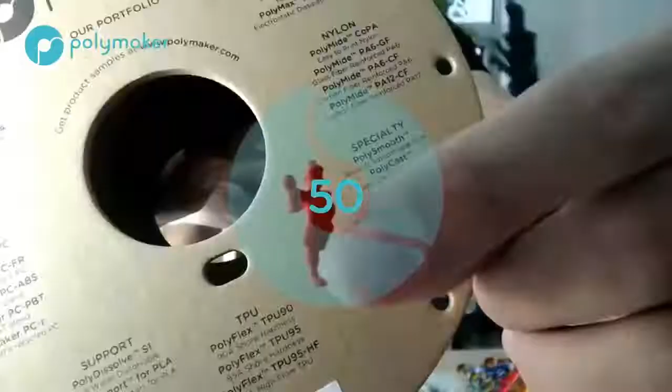So we are in the lab. 40mm tube. Whoa. Be mine. All our different materials. How do you guys like this?

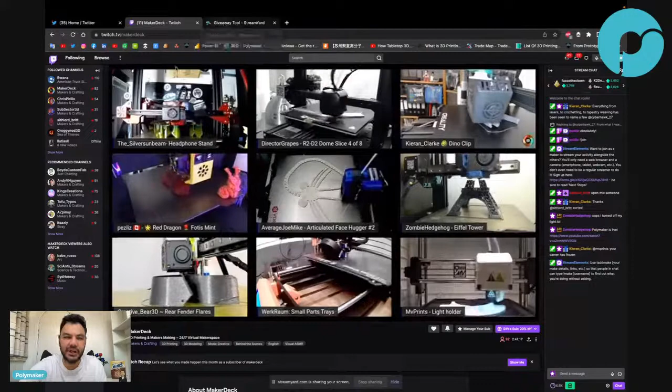Are we going to start with MakerDeck? Well, I had MakerDeck on screen just now, but this is more for Saturday, we're going to do our printer practice. Well, actually, now that I have it on screen, I really want to try very quickly.

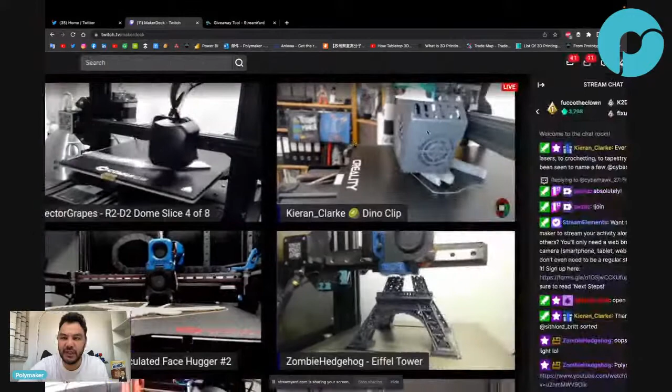Yeah, I failed this one, I don't know, the 3v2. Quick, I think this is Anycubic Viper. And then very quick, I don't know, kind of Prusa Mini. And then Voron, and then Focus, that one we did already. And then what is this one? And then Flashforge Adventurer. Okay so that's my really quick printer practice.

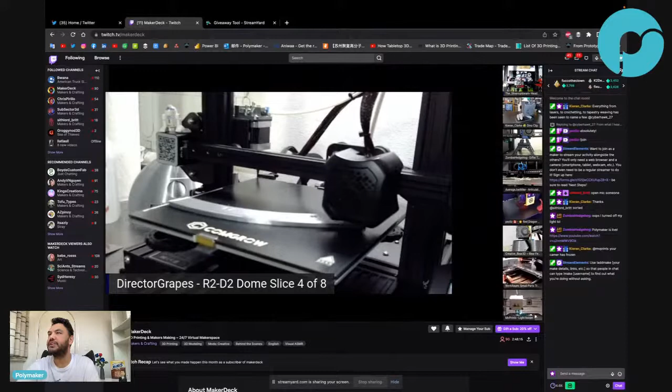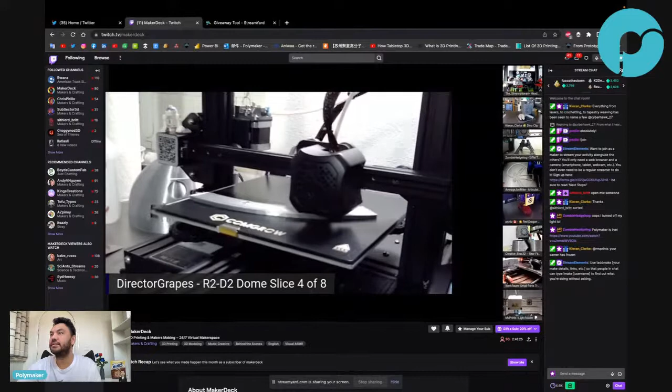Good evening everyone, hey pezliz. Yeah pezliz, I woke up late, I woke up 30 minutes late.

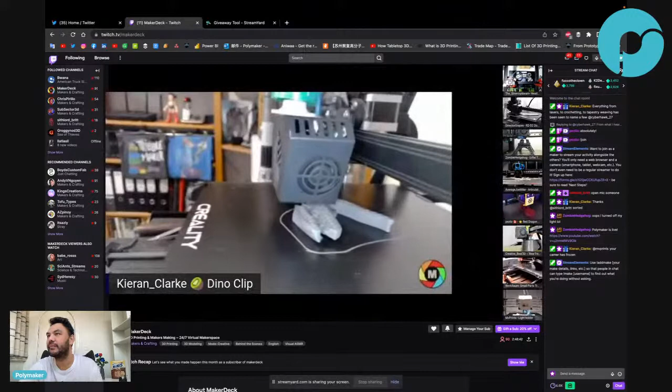Gesundheit. Thank you, Irip.

Top right is the Ender 3 Max. We will work on your printer knowledge.

Did I have a lot wrong? Yeah, I think now they have it. I think we can play the game. I think they have some kind of command that you can use to quickly get the printer name. So I think if I do something like bang make... Kieran_Clarke. Kieran_Clarke. Oh, bang make, or maker. Oh no, bang make maybe.

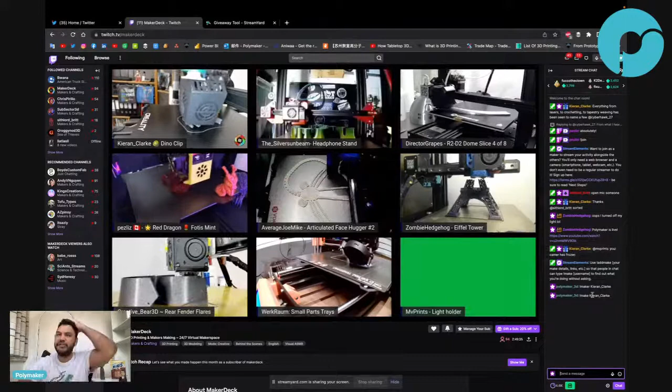Another thing is my messages somehow have been off, like sometimes I'm on Twitch and I send a message and nobody receives them, and I have no idea why. I already told pezliz about it.

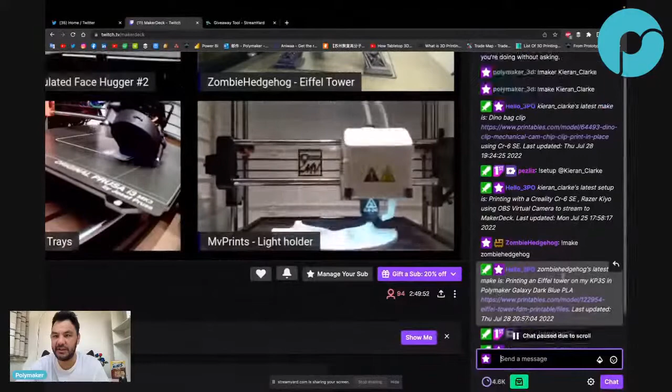Okay, so latest make, blah blah, CR-6. Yeah, you see, now you have all of these printers, but I think they were working on something as well, I don't remember. Setup pezliz, latest setup, blah blah. So there's bang setup and bang make, but anyway, I like to play that game in order to get a little bit better at recognizing hot ends and printers and stuff.

We will work on it, we have bang setup. Bang setup, what's the difference? Hi, hi, Kieran. pezliz's latest setup is fucking Odin 5, iPhone 7. Oh okay, so one is make, like what?

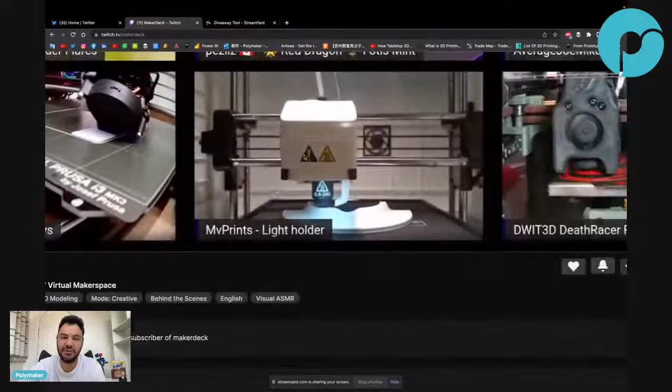Zombie is really using Galaxy Dark Blue like all the time. He's not only recommending it, he's using it also all the time. But anyway, now you have access to more information, so you can play the game sometimes, like recognizing the filament or recognizing the printer, or well, maybe not the iPhone, or what's the camera, but what is MakerDeck?

That's my line. Hi everyone. I wonder why pezliz's, yeah.

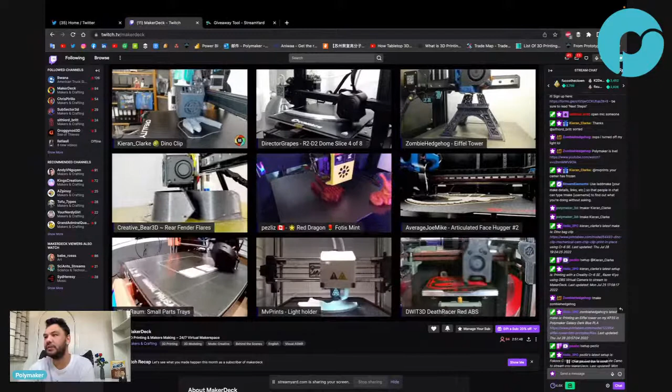If you want to do some giveaway, well, I'm thinking about it. Like, I think the best would be if you are an engineer, or there is some engineer from LDO that would like to come into PRINTBUSTERS, that would be great. I was thinking about if you have some stuff to give away, but I'm more interested in if you have some people that would be interested in coming into the stream and explaining to us some stuff about hardware. That would be more valuable, I think.

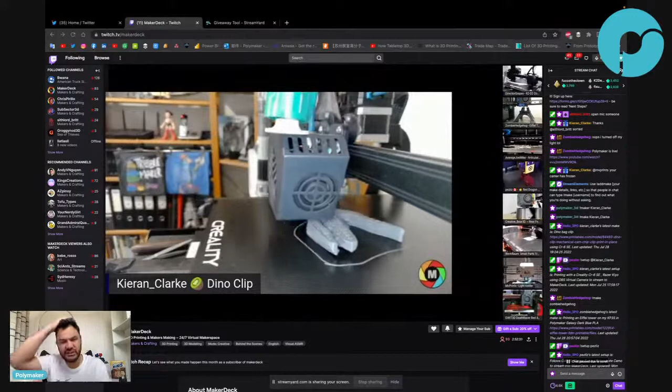Mechaduck was on Prusa, but unfortunately I didn't see it. I need to check, I don't know, I guess it was a presentation of Mechaduck or something. Creality has like 5 printer heads with the Neo one, and like 20 printers with weird combinations. Yeah, but we need to practice, if we practice then we're going to recognize all of them. Explain the hardware, then give it away. Yeah, that would be nice also.

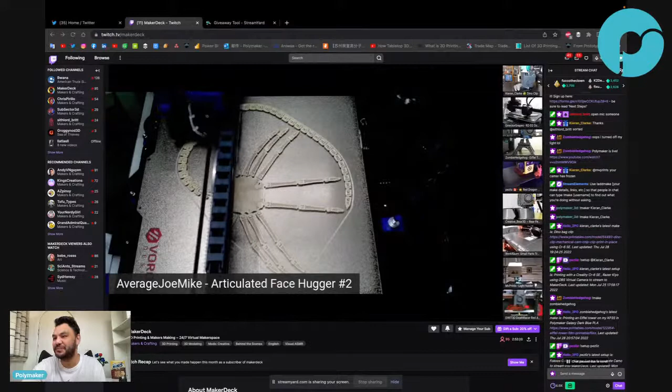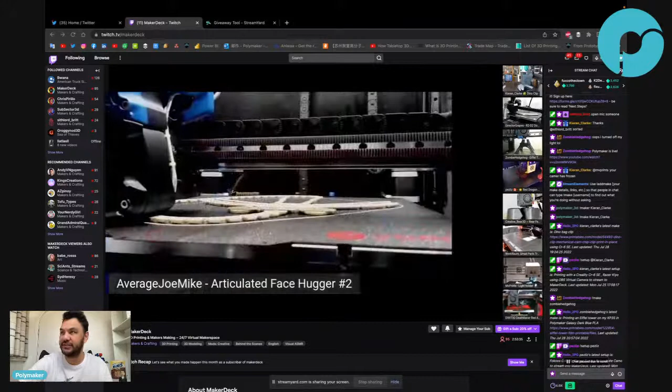Okay, let me get back to you about getting an engineer for a future stream. Oh yeah, that would be awesome, that would be awesome. So you guys are making hardware, right? And I think one of the main things you make is the stepper motor, and you are doing kits. So we are going to talk about the motion system also today, and I'm pretty sure you are making also some of those parts. That would be so cool.

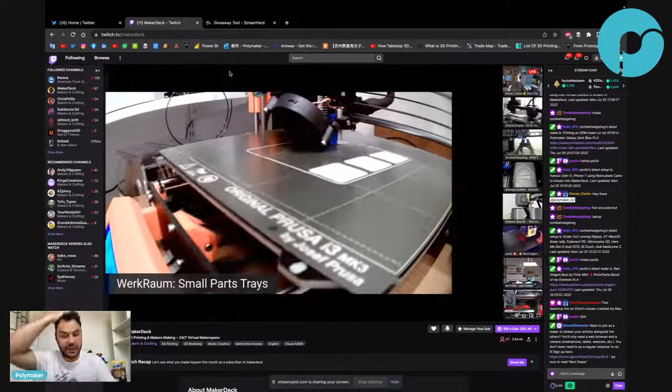Okay, so how about we have a look at that warping stuff? Let's go. I was just waking up by reading a bit of the chat, so my mind is warmed up before we get into that.

So again, we were talking about warping, and I went through the usual stuff about why, why, why, and then Resu stepped back a little bit, thought about the discussion, came up with something, came back and wrote a nice thing about warping, and that's the thing I want to check with you guys.

Okay, here we go. The data does back it up. So in the stream, there was a question if the thermal expansion value of PLA and PC are similar, why does PC show more warping? I even used a lower thermal expansion value for PC and still predict higher warpage based on my model.

Okay, so his hypothesis is to explain why a material would warp more than another one. His hypothesis is that when the hot bead is laid on top of the cold layer, the temperature does indeed even out. So when you print one layer on top of another, the other layer is going to absorb some temperature from the bead you just laid down.

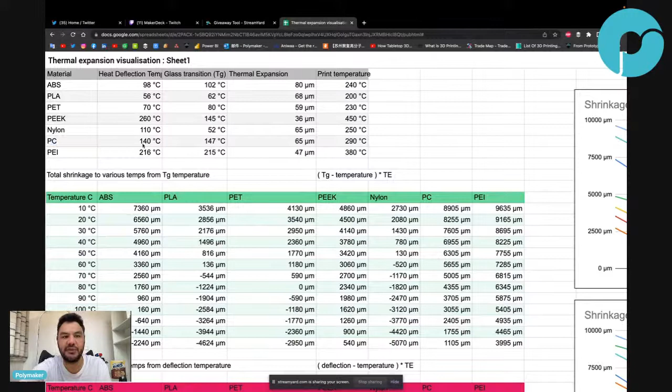And then our question was always, why does PC warp more than PLA if the thermal expansion was the same? And then you have the print temperature. Again, PC doesn't have to be that big - our PC TG is 110 and printing temperature 260.

But okay, and then total shrinkage to various temperature from TG temperature. So you have 10 degree. So then he's total shrinkage to various temperature from TG temperature. Okay, so now he's calculating - if you are, let me check.

Total shrinkage to various temperature from TG. So if you are 10 degree from TG, which means 90 degree - from 100 degree to 90 degree, I guess, then it's going to shrink this amount. And then from 100 degree to 20 degree. Oh no, so what is she saying? Total various to temperature from TG temperature - TG minus temperature, times the thermal expansion. Okay, so that's the temperature.

Oh, so that's the room temperature. Sorry, that's the room temperature. So if you print with 10 degree room temperature, then the shrinkage rate is big because the difference between TG and the room temperature is big. And then if you print at high room temperature, then the shrinkage reduces.

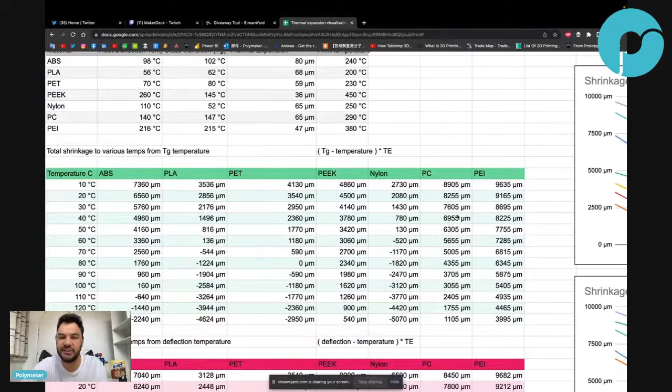Okay, and then he has for ABS, PLA - for semi-crystalline it's hard to say because crystallization has so much to do with it. So let's just stay on amorphous, and then PC - shrinkage rate total TG to C. And then total shrinkage to various temperature from deflection temperature. Okay, so it's the same, it's similar. So okay, no problem.

The upper graph there is showing expected thermal expansion from TG, which was my first guess. We can clearly see that the data doesn't correlate with what we would expect. Based on TG only, nylon would be more stable - again, nylon is semi-crystalline, so I would remove it from the equation. But if we look at deflection temperature instead, we can see that the data shows a clear correlation to what we would expect. Okay, so now he's making a clear difference between TG and heat deflection temperature.

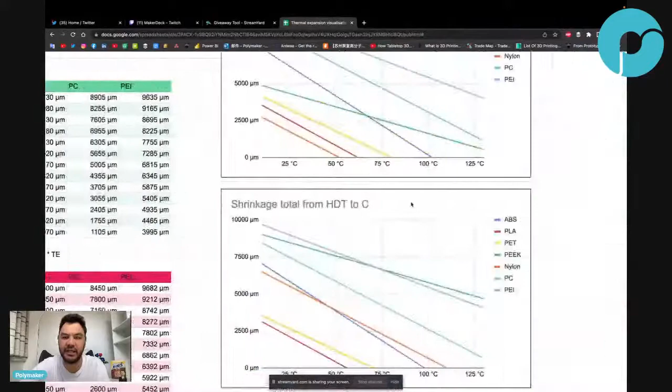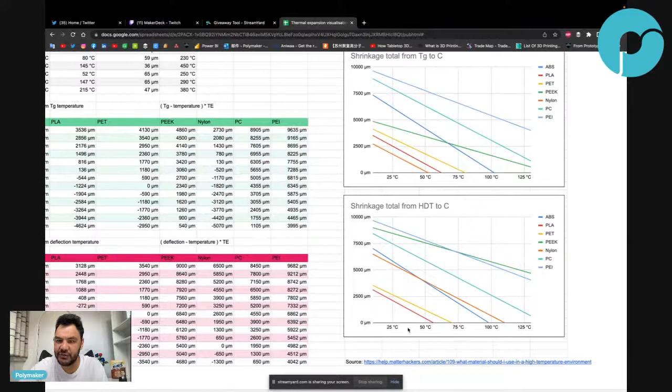So if we go heat deflection temperature and then PC and PLA in red and PET there. Okay, so basically, let me check nylon. Yeah, but I think he shouldn't take nylon because heat deflection - so basically

here's what happened. I think he made the thing with the TG, and then he realized nylon warps less than PLA, and then he went to try to find different data that would make nylon warp more than PLA. But the problem is, in my opinion, nylon doesn't warp for the same reason. Nylon warps because it's semi-crystalline. Nylon warps because of crystallization. Michael, if you have read the book, then it's in the book.

So I think TG was great, and TG and HDT for amorphous material are similar anyway. So I don't think he should have changed his data just to make it fit. We don't try to find data that matches the reality without explaining it - you get what I mean? Like you don't choose the graph that matched the reality and say that's this graph because it matched the reality. It needs to have some explanation.

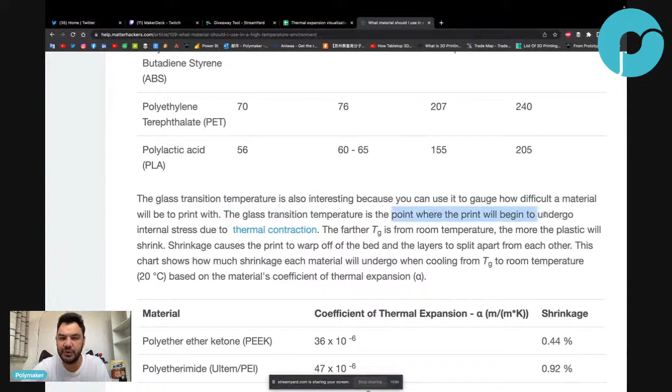The glass transition temperature is also interesting because you can use it to gauge how difficult the material will be to print with. The glass transition temperature is the point where the print will begin to undergo internal stress due to thermal contraction. The further TG is from room temperature, the more the plastic will shrink, blah, blah, blah.

Yeah, again, my take on this one. But okay, so now let's go back to this. What do you guys think about this explanation? For me, that's not the first time someone brings up that TG, and my answer is usually always the same.

My answer is, if that's the case, if you print ABS at 230 degrees or at 260 degrees, the result would be the same, which for me, in my experience, and I hope in your experience as well, because I know you guys print a lot, that's definitely not the case.

Depending on the printing temperature, you have different results. If you print ABS at 230, some ABS can still extrude at 230, then it will warp like crazy. If you print at 260, then much less. So why is that? The TG is the same.

The difference between TG and room temperature is the same. But why does - so the follow-up question to that explanation is, why does printing temperature affect warping?

Okay, and we have seen some research of people printing at different printing temperatures, and they had different warping results. It was a quick research - only five times, three tests at different temperatures, but we started to see a correlation.

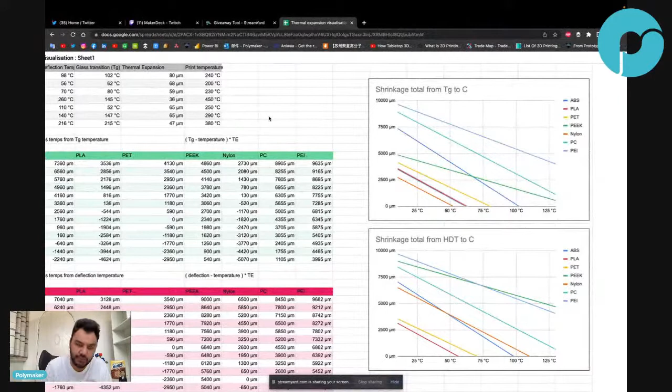In that case, if it only depends on TG - so first I will clarify that he should remove semi-crystalline and remove the HDT, because I think it doesn't make the explanation accurate. But if you remove that, then it's very clear.

Now the question, and it makes sense - that's the most important, it makes sense. However, does that answer the question on why the printing temperature affects warping?

When I say printing temperature, I'm talking about the extrusion speed, which means printing speed and printing temperature would affect warping.

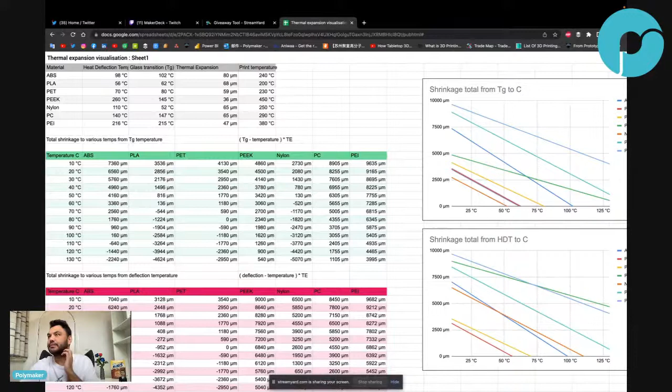Okay, so look at my photo just over this text. It's PolyTerra PLA.

Oh, this one. Did you have any warping issue? Sorry, it's a little slow. Did you solve that? It looks like you're using the smooth PEI from Prusa. I've heard some other people having warping issues with PolyTerra on smooth PEI, so I don't know if flipping it over to the rough surface would be better. But I hope you solved your problem.

Hi 3DHP. Did I answer you, 3DHP? I don't remember, but like I said earlier in the stream, today is my last kind of busy day.

Not trying to be smart or anything, but how much can you beat a dead horse about warping? What does that mean - not trying to be smart, but how much can you beat a dead horse about warping? Is that a phrase? Beat a dead horse? Does that mean you talk about it a lot? Oh, okay, yeah.

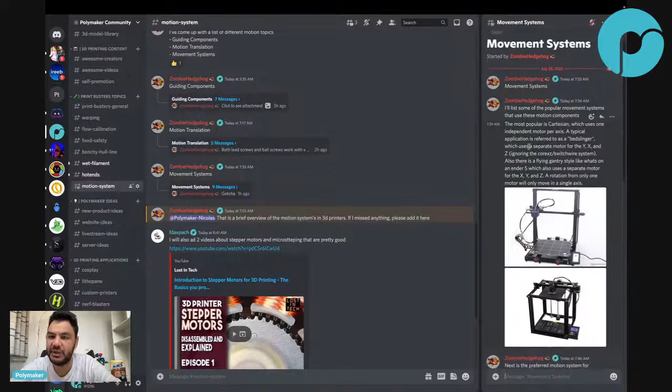Okay, so that's the general thing I was saying, you take a printer and then you remove all the stuff. I think the most popular is Cartesian, which uses one independent motor per axis, a typical application. Okay, Cartesian, and then Core XY, and then you have Delta, I guess.

But it only uses belt, blah blah blah. Okay, understood, and that's okay, so that's the way we are going to organize our discussion around the pros and cons. So you have different guiding components, the connection, okay, and then the motion translation, and then the movement system.

Yeah, I think it's very clear, I think it's very well defined, and yeah, I really like it. At least for me, it's extremely clear - well, clearer than it was 5 minutes ago.

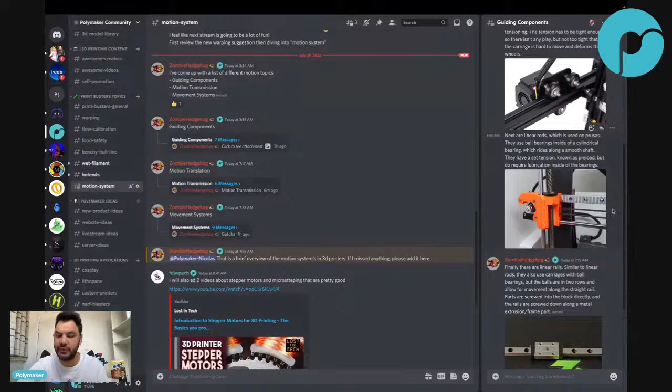Do you want to come and stream now and give us the pros and cons of the different guiding components? Maybe we can focus on the guiding component, and depending on whether we have time, then we go to the other one. Sure, okay, let me figure out how to invite someone on the stream.

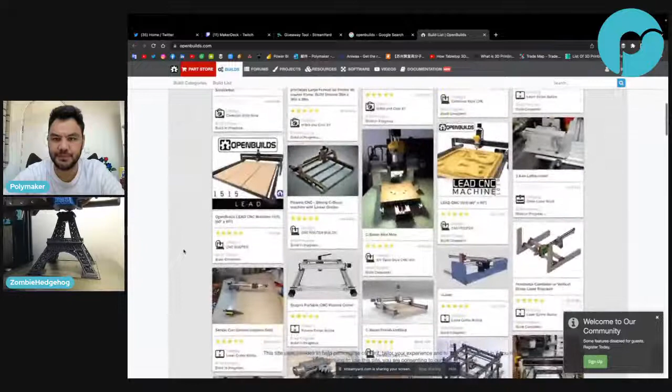Is that another Voron style? I mean not Voron style, but custom printer stuff. I haven't looked much into it, but it's like this custom printer. Open Builds itself right now is just a collection of all these custom printers that people make and design. But there's an Open Builds specific motion system that uses slightly smaller V wheels. They do more CNC than printers. Oh, it's a company, okay, I didn't know that. So they're a company and they use a specific V wheel system. Okay, V wheels was designed by Open Builds. Okay, oh interesting.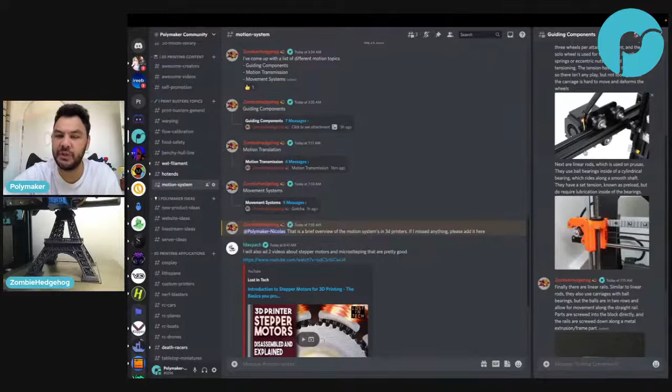Okay great, and I think there was a question about how fast do the friction components wear out with the rails. So I guess each of the guiding components will have a wearing issue. So how do they compare with each other?

Okay, so V wheels are probably the worst. I wore mine out in about a week. A week? Yep. I had them too tight and they deformed, and my print quality suffered. So I had to order new wheels, probably like two weeks of printing. I also researched this stuff, since I had no knowledge of 3D printers, so this was from scratch. But yeah, I had them too tight because people said you just want to get them really tight. So I made them really tight, and then you could move the carriage and it's just lumpy, it feels like lumps.

And then would the other have a similar issue? Because it looks like there's no rubber part on the other. So the others use... I don't know what the rail is, it's probably like a hardened tool steel. So it's a very hard steel rail and a similar steel block, what do they call that, a carriage. Similar carriage, and then they use hardened ball bearings. So it's metal on metal on metal.

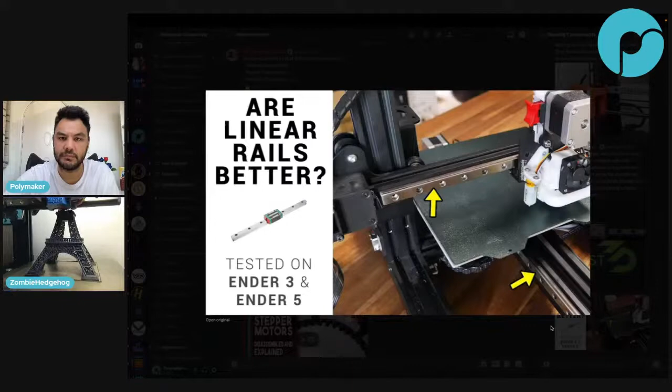Okay, so if they're lubricated properly, then they last a long time, and all you have to do is once in a while relubricate. Okay, so the maintenance for a V wheel is just to make sure they have the proper tightness, not too tight, not too loose. The maintenance for linear rail is once in a while just lubricate the ball bearing inside.

Right? Correct. Okay, and how about in terms of what you were talking about, you really need the proper rigidity. Is there... because the linear rail, you were saying you bought it as it is, right? The user cannot change anything, so that means it's actually much easier for people to get linear rail in a way that they won't have to tinker with the tightness, right? Or is there some kind of screw somewhere that would make the ball bearing tighter than other, or something like this? Nope, it's completely manufactured.

Does anyone in chat know what makes the preload, the stiffness, the preload? Like how do you define that? Actually, is LDO still here? They would know. Yeah, maybe. Because there's the rail size, which I think is consistent, and then there's the ball bearing size, and then there's the carriage size. So there's those three components, and the combination of sizes of them would define the preload of the tension. Okay, would it be... do you think it could come from the accuracy?

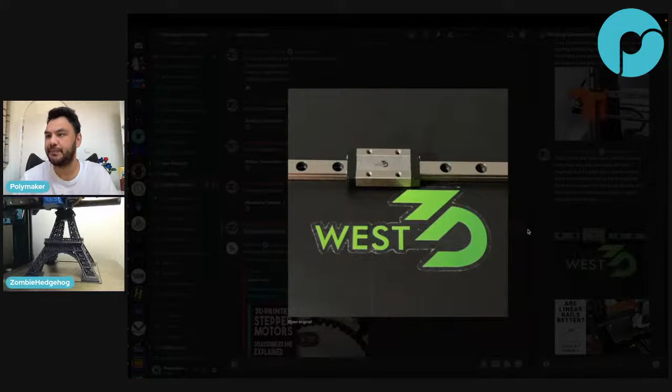FDAF patch: preload comes from the machining tolerances. Lower tolerances give you bigger and higher preload. Yeah, that's what I was thinking. But then that would make the more rigid part more expensive, I guess. Preload is the tolerance between the rail and the inner top face of the carriage.

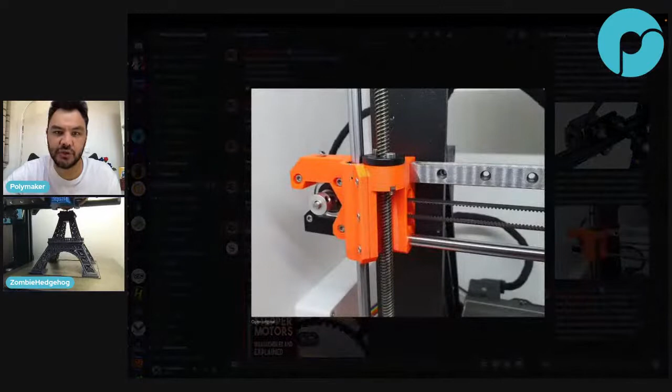Wait, actually there's a third one - what is this one? Linear rod. Yeah, that's like what a Prusa uses. I believe that's the technical term, linear rod, but it's a very similar concept. There's a bearing, but the balls go all the way around it, kind of like in a cylindrical zigzag.

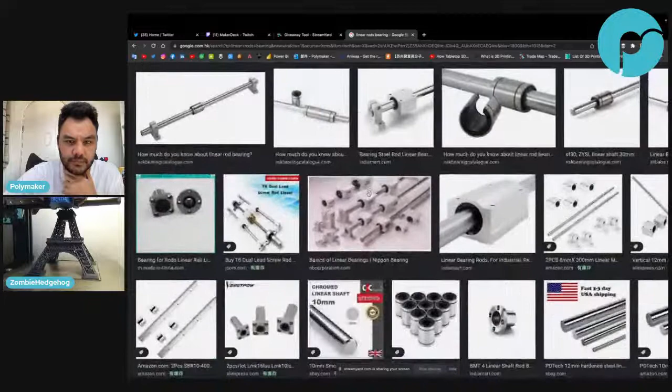Maybe we can pull up a picture of a linear bearing. They ride around a rod, so the rod itself is only supported at the two ends. Should I look at the live one? Yeah, that's a cutout of it - this one has the balls just going back and forth. So it's just like a linear rail, except it has 4 sets of balls, usually 4 sets of balls that make contact with the rod.

So now the question would be, because it seems to be the same idea - linear rails or linear rod bearings - but one is a cylinder shape and the other is a rectangular shape. Is that the only difference? And how the rails mount. I believe linear rails have more constraint, so they don't jiggle as much. I believe.

FDAF patch: they machine a lot of rails and carriages, then test the tolerance and match them according to their tolerances and the space between rail, ball, and carriage. Lower space gets a bigger preload. Okay, so they don't actually manufacture it specifically for that - they just spec out their rails as different preloads. Seems like so. Okay, which would make the price the same - now it explains why they are the same price.

It's kind of like how they make processors, CPUs - they just make them, then test them, and the good ones become high quality processors, and the bad ones get partially disabled and sold as cheaper, but they're all the same thing. Oh really, I didn't know that. Yep, interesting - that's why all the expensive ones come out first.

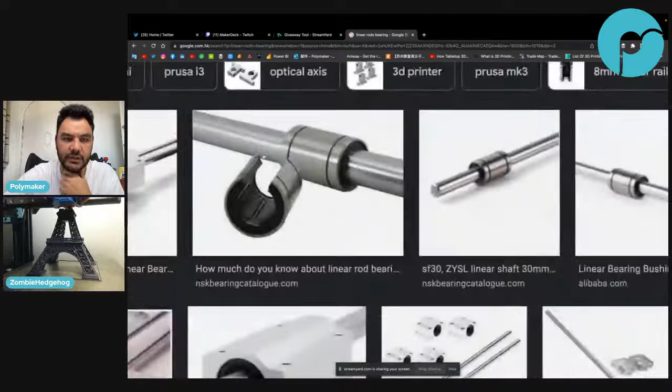Sorry, can you repeat that? Linear rods are only connected at 2 points. The whole intersection is open, it's floating, unsupported. Oh okay, yeah I get it.

And the linear rail, yeah, linear rail is screwed onto something. It's screwed onto an extrusion, or usually an extrusion, so that helps add to the stiffness.

Okay, makes sense, so that goes back to scalability as well. Big printers - linear rods would be a very bad idea, right? Because it would completely bend if it's too long, right? Yes. Yeah, okay, got it.

And you were talking about you need a set of rods. For example, I'm trying to understand what is in the middle here. Is that a mix between a linear rail and a linear rod? I don't know why I posted that picture, it's really weird, can someone find that for me and figure out what that is?

Do some homework. I thought it was a Prusa. I guess not, I don't know. It's definitely not a Prusa.

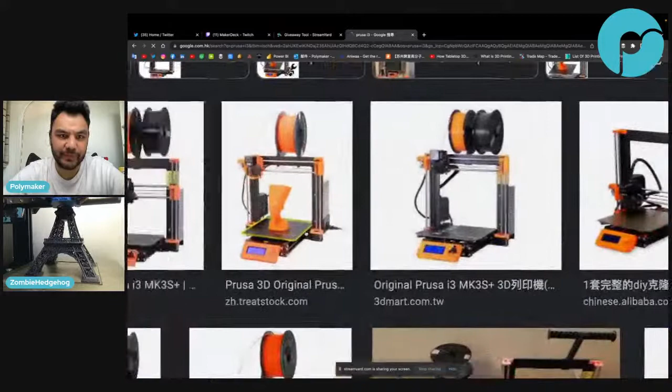Linear rails, or the shape of linear rails, help make them more rigid. Yes, that's true. It is a Prusa - someone must have taken a Prusa and then added a linear rail because stuff mounts to rails better. Oh, Prusa linear rail mod.

Okay, linear rails have become cheaper because of the popularity from 3D printers, and linear rods are getting expensive because they are getting forgotten in 3D printing. Yeah, supply and demand, right?

Interesting. So, is there some other fancy guiding component that you didn't put because it's not common? There's one more - what's that printer called, the Pantheon? It uses all ball screws for everything. I do have that in the other section, but it's not common at all.

You might want to type printer. Yeah there we go. Oh yeah, okay they are using - oh okay, okay, so they - whoa, but is that fast?

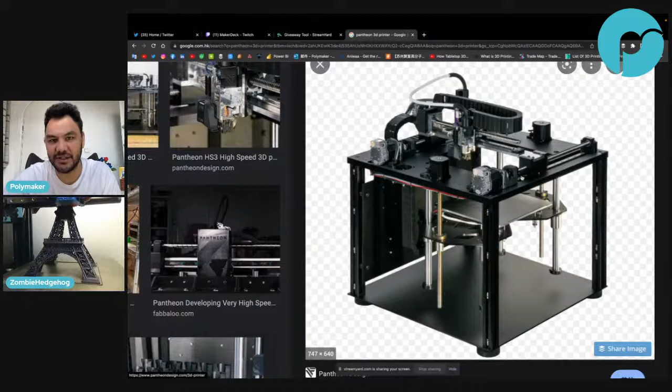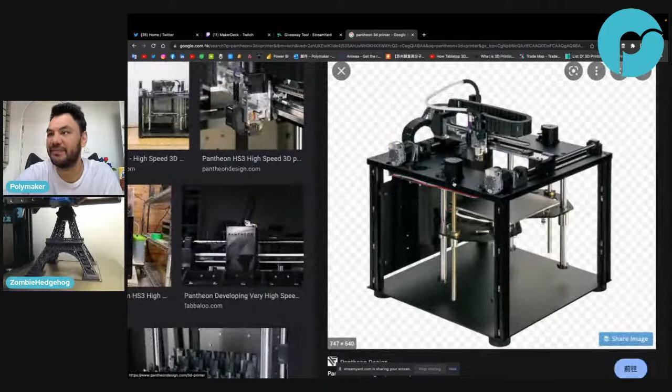Yes, but you need crazy stepper motors, right? I mean, you cannot do that with a regular one, no? Oh, did anyone find that GIF of Nero, or could you post that somewhere? You know the one I'm talking about, right?

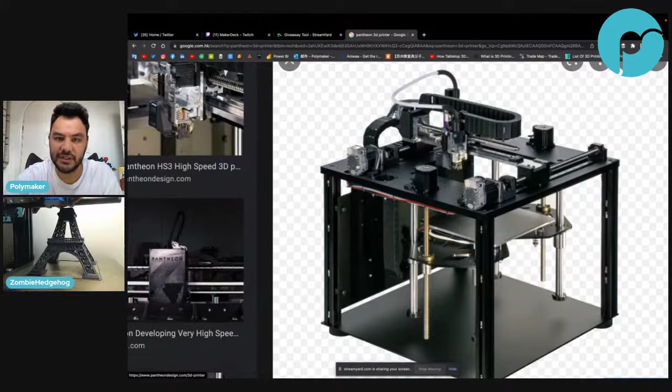Nero on stream, he has a ball screw - sorry, what is it called - a ball screw, and he shows how fast it moves, but it looks a bit explicit so he took it down. Yeah, it looks like the motors are completely different, I mean these are massive, these are servos, so they're closed loop stepper motors, which is something I might look into for one of my printers.

Nice, interesting. So, okay, V wheels, linear rod, and linear rails. Yeah, and they posted the link in chat, yeah, they posted a link down there. And that's for the linear rail.

Oh, so that's the upgrade. Let me open that on the other screen. Let's check that. Oh okay, okay, so there you go - this is where you got the picture.

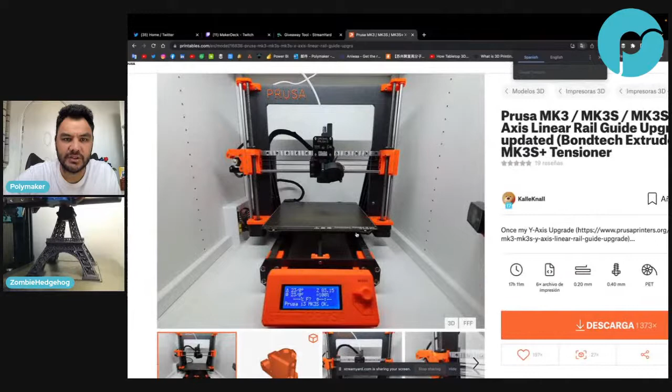Interesting, so that mix must help with stiffness, I'm guessing, because a rail in general is more stiff than a rod. There's just more mass, so that probably adds to the stiffness. That's a belt driven system. I highly doubt that affects it too much for that size, but it's probably something.

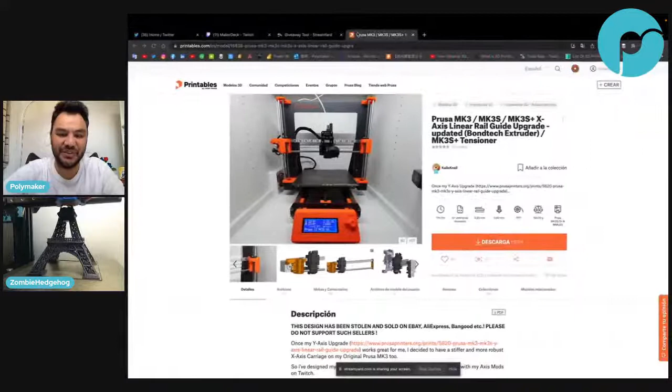Cross gantry... oh, the hang printer. Yeah, I've seen that printer during the TCT show in Shanghai. It's a very interesting one, but very particular. I put a linear rail Y-axis mod on my Prusa. It doesn't allow me to print faster, but it is definitely more rigid and quieter.

Is this something to do with noise? When you choose these, are some more noisy than others, or is it the same? I'm guessing the rods have more balls, so they're louder. The more balls you have, the louder it is, because V wheels are actually really nice if you want a quiet printer, since it's a silent motion system. You can listen to the balls go on a rail.

Okay, I think that probably sums it up pretty good. Did you explain cross gantry? Kenneth, I have no idea what cross gantry is, so I don't know if it's part of this element. Do you know what that is? Zombie? Yeah, it's part of the third discussion.

Essentially, it's core XY, but instead of just having one rail go across, it has two rails going across and a cross gantry. The annex systems use that. It's a lot of linear rails, I'll tell you that. It uses six linear rails just for the motion system.

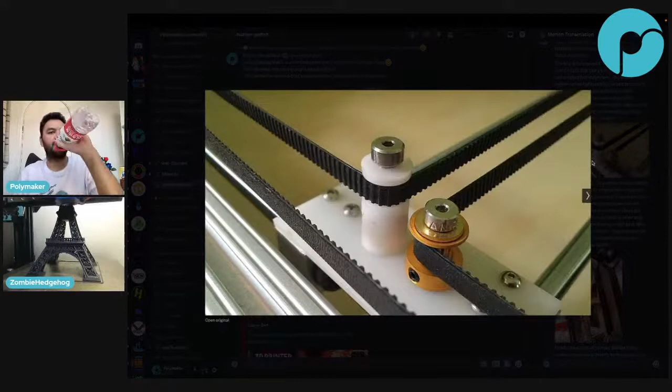Okay, so let's go then. What are the differences? Everyone probably has belts on their printer. Almost every printer design uses belts on at least the X and Y axis because they're the best for speed and cheap. They work very well for being cheap.

I guess I can explain how they work a bit. It's a motion path that can go in multiple directions and support fast movement. So unlike any other motion system you might find, belts can change direction, think about a Core XY or any other printer like that.

Hold on, 3DHP says since you're on live, let Nick know his countdown: 5, 4, 3, 2, 1. He says that out of order. I'll let him know.

That's the main advantage of belts - it's very versatile, can be used in any design. It's very simple. All you have is a motor with a pulley, and at least one bearing. That's all there is. It's very simple, and it scales very well.

Last time we talked about the issue with tension. So is that one of the downsides of belts? Like, what would be the downside?

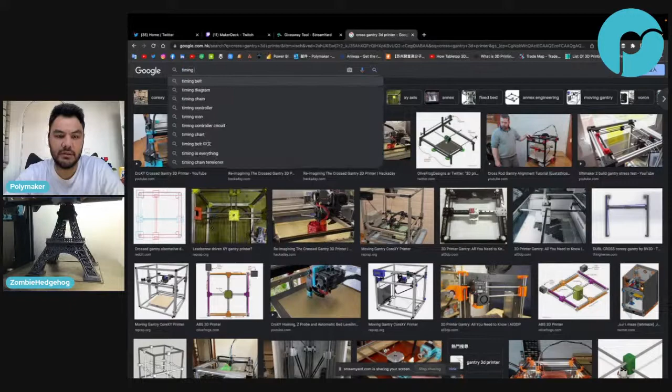Mark and Draka also talked about Gates belts - what's that? I can show you. Gates, can someone explain that in chat? It's just a manufacturer, right? And the GT2 belt is a standard size. There's a lot of vocabulary for that, like V belt, named for its shape.

This is a Gates belt apparently. GT2 is a teeth pattern. So is there a difference between timing belt and Gates belt, or is that the same? I think they're all called timing belts - I think that's the style.

So timing belt is the overall category, and within timing belt you have Gates belts, which are some kind of... Gates is a manufacturer. Oh, Gates is a manufacturer, okay. I'm still learning a lot as I go, same here.

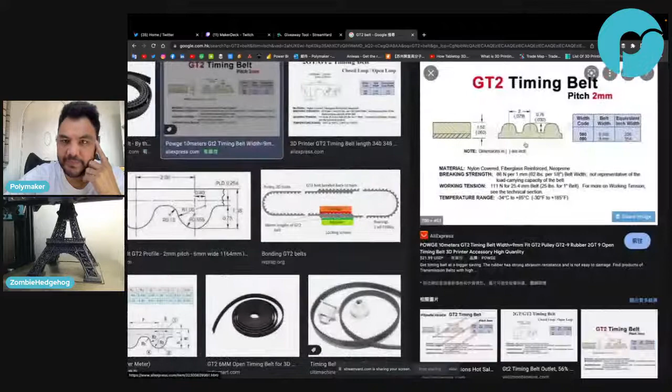GT2 is also a car - they probably use a similar timing belt in the car. GT2 timing belt - that's the specification for the little notches in them. The pitch is 2 millimeter.

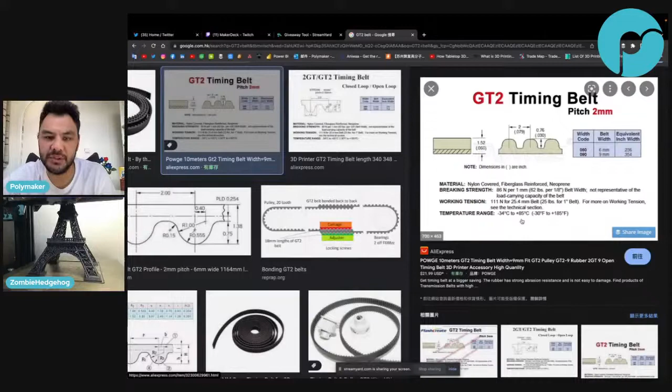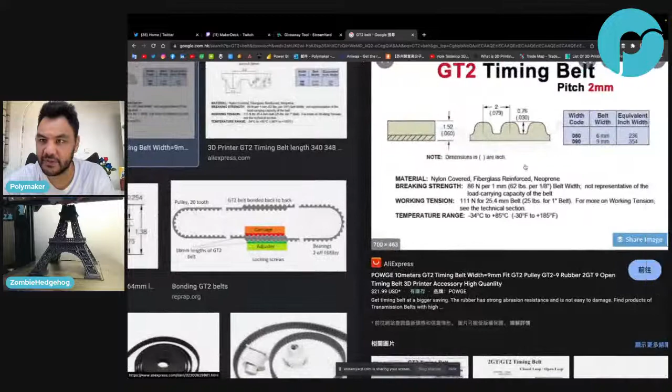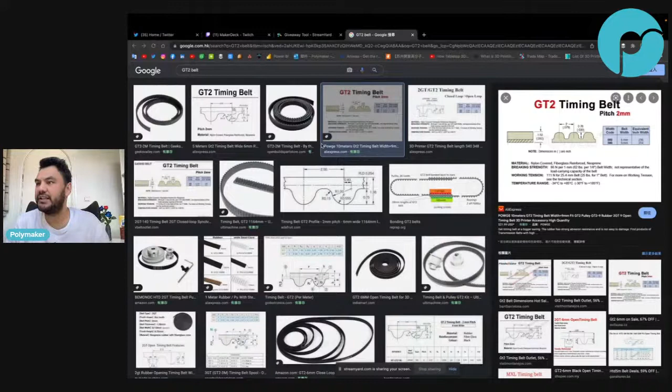Gates does make timing belts for automotive use too. So Gates is a company that makes a lot of timing belts, and they're known for producing very high quality belts. You can get high temperature belts that can withstand over 100 degrees C.

Let me check, let me put you back in. Yeah, there you go. You still hear me? I can hear you. Okay, great. I hear myself now. Okay, that's better.

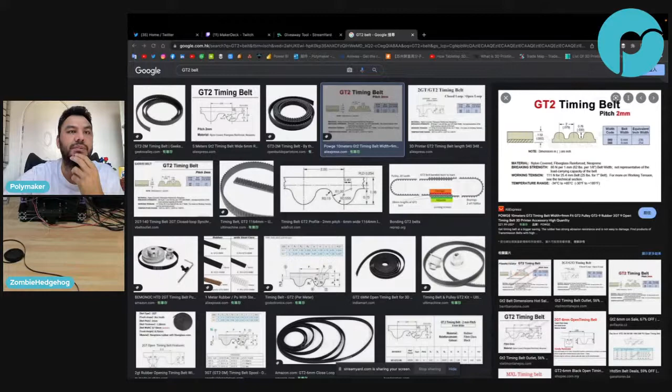So this is actually the belt from a Voron. It's a Gates Power Grip. So looks like that, how do you call that? Power Grip, that's the model. Yeah, that's the model, Power Grip. So that's a typical one you see on printers, and some of them actually come with Gates belts. My BQ came with one, I think. Oh okay, so Power Grip is a model, a product model, right? Yeah, and Gates is the manufacturer of Power Grip. Okay, got it, got it.

Yes, even in just the belt itself there's a lot of stuff. So here's the question, I guess there's a standard pitch for all 3D printer belts, right? Is everything 2 millimeter, or do some printers use a different pitch? As far as I know, all 3D printers use that same pitch. Just different thickness of belts, so 6, 9, 10. And then different material and different reinforcement, right? But the pitch is always the same.

Yep, okay, understood, understood. And by the way, my workspace is not very clean. I just pulled the Nick method of just sliding everything out of the way. Trust me.

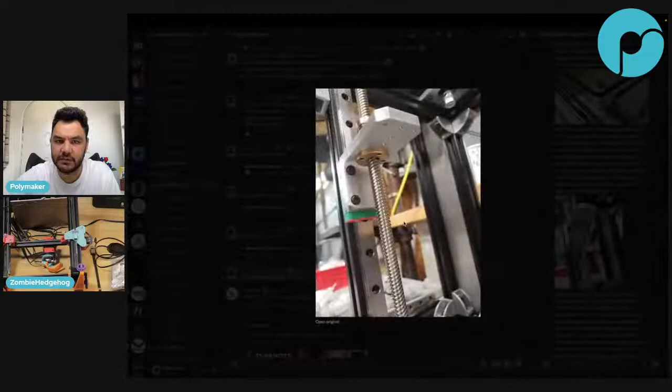I'll be honest, I've heard a lot of mixed topics on that, which would be great to discuss on PRINTBUSTERS if we ever do that. But if you constrain it, then if the rod has any wiggle in it as it goes around during rotation, it's not going to be a consistent rotation, so it's going to have more force as it goes around. It's moving - so I have no idea why that's a thing. It doesn't make sense to me, because if you constrain it, then you're going to have more issues than if it's unconstrained.

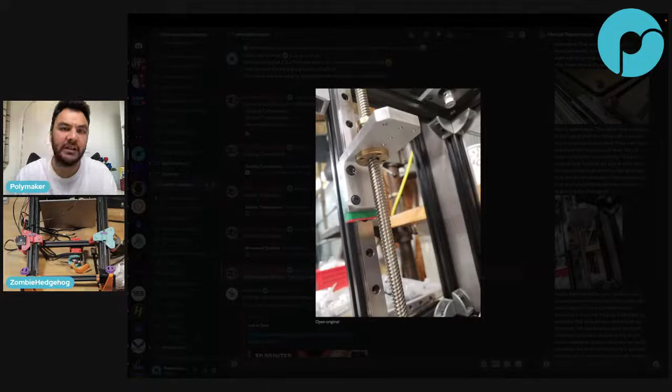Oh yeah, that's a good point, because there's already two parts, right? There's the stepper motor plus the brass part connected to, in this case, the linear rail. So you already have two parts maintaining it. So what you're saying is if you add a third one, then that messes up, because now you have 3 points on the line, and you have to have the 3 points aligned. Right, but 2 points is much - oh yeah, that makes sense.

How about - I don't know if there's anyone in the chat that has this type of printer, but what's your thinking of this? Do you need to put that modification on top where you maintain the tip of the lead screw, or do you think it has to be let loose?

F patch: lead screw is called lead because lead is the property of how much strength or movement you have by one rotation. The correct engineering term is power screw. Oh okay, yeah, here's some good definition there. F patch, you're very good at making a great definition.

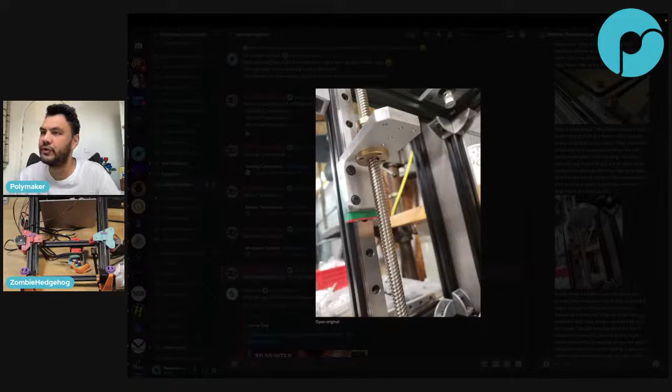You need to get Nero in to talk about lubrication. Why? It's - also lead screw have backlash more easily and more friction. What does backlash mean? It means when you're loading on one side or the other, it's going to wiggle. Is that what backlash means?

Yeah, backlash is - I actually have some anti-backlash right here. Backlash is, since there's play in the system, backlash happens when you move up, and then it keeps going because there's momentum - it can't stop on a dime. So because there's play, you're going to have backlash. So if you have your acceleration on your z-axis too high, then you'll have backlash.

Let me see if I can put this together. I should put my zoom camera in. Do you have a hardware warehouse or what? Yes, I do. I'm not joking, I can build like a lot of printers.

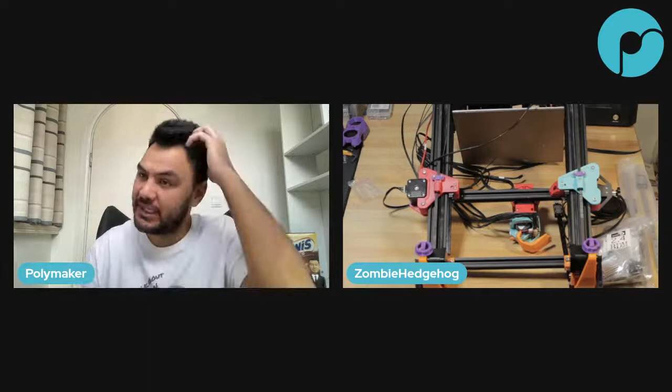Lead screw should be kept floating. I believe constraining both ends will result in print artifacts. Okay Caleb, that's a good print buster topic, because I've seen a lot of people making that modification. So if we could bring some science there, and explain that it might not be a good idea, that would be great.

This screw should be kept floating. I would keep one end free. So most of you are more on the side that we should not do this modification. That's good to know. The screw is steel and the nut is brass.

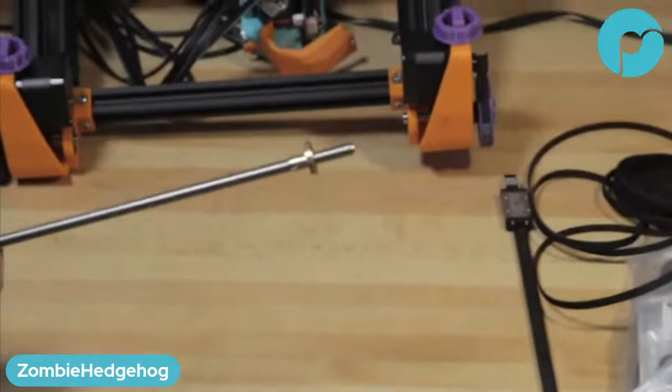So this is a lead screw. I probably need to focus again - how do I put a certain focus on it? I gotta manually focus it, so bear with me.

So yeah, this is the brass nut - right here. That's the brass nut, and that just slides along. It's pretty smooth, and it'll actually go by itself if you twist it.

But the issue is there's play. I can move this back and forth, and there's a little bit of play in it. It's not stiff. So like you want in a linear rail, this thing right here is stiff - there's absolutely no deformation in the other axis, it only goes in the one direction.

Does that really matter in a way that if it's used on the z-axis, then there will always be the load from the gantry, right? So that means does the play matter? Because there will always be the load of the gantry.

That's a good question. It depends. Because if you're using it on the XY, then I would understand, because if you spin on one side, then it would be on one side, and then you start to spin on the other side, and you will have that play that will be a little bit late. But if it's on the z-axis, then it will always be on one side. It's not a huge issue, but it can cause problems, and people have seen issues with it in the past.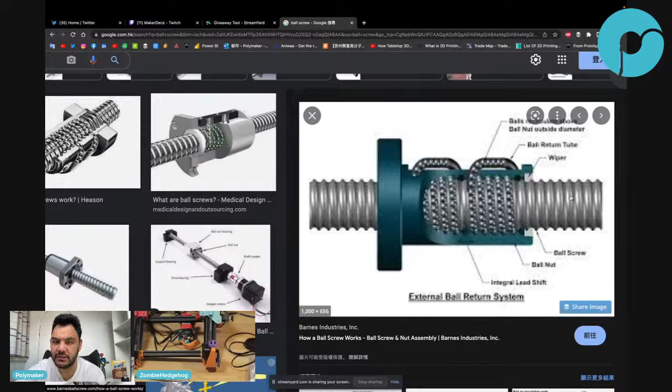Okay, but the screw itself, why is the screw different? Look at the pitch on the actual threads - they're at an angle, so there's a groove for it to ride in. On typical linear rods, they're just sharp, like squares, if you can find a profile of it. Oh okay, so it's like an extruded square versus a triangle.

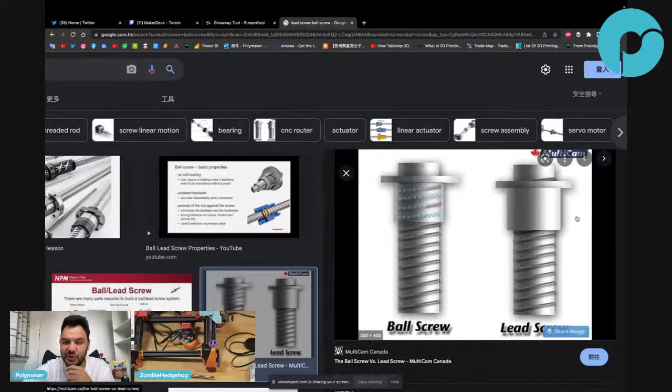Oh okay, so it feels smoother, right? The ball screw - yes, oh yeah, okay, it's rounded because there's balls riding inside of the track. Yeah, in my mind it's like this picture - they are the same, but one has balls and the other one doesn't. But there's some stuff to it. I understand, essentially profiles of shape.

Okay, so pitch is how far the thread is, and profile is the shape of the thread. So in the ball screw, the pitch is most likely the same, but the profile is different.

Got it, correct - ball screws look like linear rods and lead screw combo. Yeah, that's exactly what they are. It's a linear rail, but on a rod. Yeah, or linear rod. My linear rods are in a printer, so I can't show them.

Okay, so how - well, it helps with what to have this. Is that just smoother, you don't have to lubricate compared to the other? What's the advantage? Well, it's stiff - it's like they're ball bearings, so there's no play in the system. So it's extremely stiff, and it has the same properties as other ball bearings, so it can go very fast. Ball screws have zero backlash, they're more precise.

Which is why the Pantheon uses all ball screws, so they don't use any belts. They don't use anything else - they have a stepper motor tied directly to a ball screw, and that is their only motion.

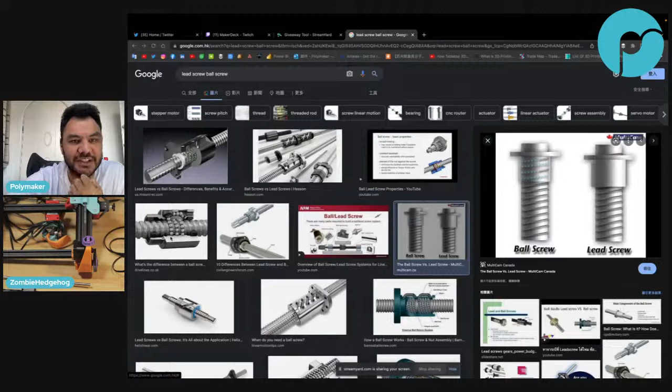So does that mean it's much more expensive? Like when I see the system - yes, you don't want to know how much these cost. No, like one - how much does one cost? So if linear rails are in the order of $20 to $30, these are like $300 to $1,000. Oh really, they're expensive.

Yep, there's a whole thing on different grades and quality. In fact, I know someone good to ask - MirageC has a whole video on that because the Hevort printer uses ball screws on the Z axis. So he has a whole series or video on a modification they do to those to make the cheaper ones more stiff. Yeah, one ball screw costs one printer.

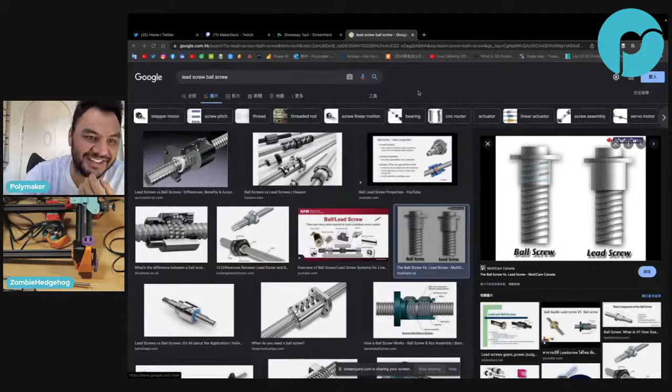Yeah, if it's 300 then I didn't know it was that expensive. But good, for that, now you can get the cheap ones and they aren't that bad. They're about the same price as a linear rail, but the quality is a lot different.

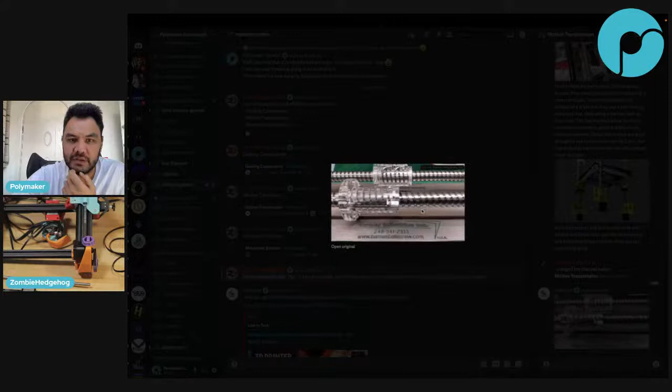Oh okay, yeah that's pretty satisfying. Cameron says rolled ball screws and ground ball screws have a big price difference. Exactly, so there's two different ways of manufacturing them - one of them is kind of extruding them as they go, and the other one is actually milling them down in a machine.

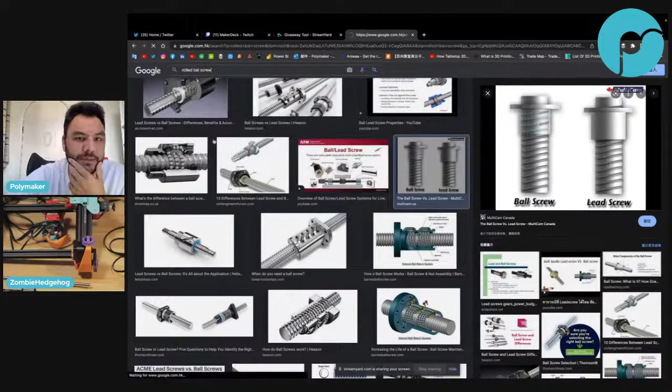Come again? I'm not very knowledgeable in this, but rolled ball screws are kind of extruded as they go or something, and then the ground ones actually take a precision robot and grind them down to a precise size, which is why they're way more expensive.

Okay, ground ball - did I get that right? I don't know, probably - honestly, I'm gonna link the video for that because that's a much better explanation. Okay, yeah, cool, cool.

Okay, and then same question as the belt - so for the belt, you said belt is good for speed, so that's why it's mainly used for the X and Y. Do I know any printer using belt for the Z axis? I think one of the LulzBot printers is using belt for that. Or do you know any printer you can buy? Not that I know of.

Does anyone know? I think there is a LulzBot with a Z-axis belt, I think there is. I can show you a printer that has a belted Z.

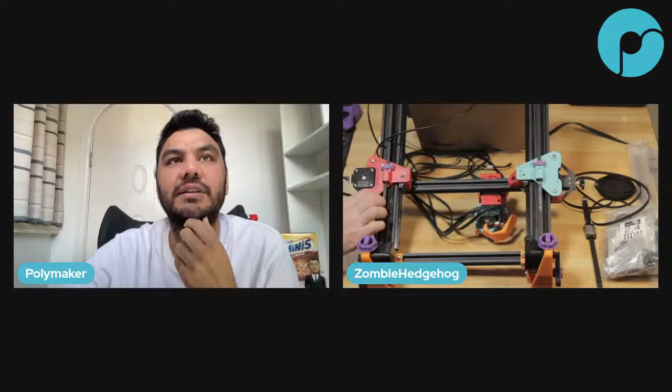Would there be any advantage of having a belt for the Z-axis? Oh yeah, okay, so it gets rid of all of the issues with the lead screw, because belts are a stiff system, so there's no play in the belt. So whatever movement happens on the Z is translated 100%, whereas you have the issues with backlash in general.

If it's not lubricated, then you'll get binding on lead screws. It's very common when they're not lubricated. Z wobble - so if you don't have a straight rod, then it'll fix that issue.

What's Z bending? Is that the wobble also? Oh no, bending is the fact that it's not straight, right? Yeah, when it's not straight, and other issues with binding.

It gets rid of lead screw issues at the expense of complexity. So installing a belt is more complex than having a simple lead screw. It is, because depending on how much weight you have in your system, you can't have a motor tied directly to the output. You have to have a gear reduction, like we were talking about with the lead screws - it's very high torque, so it takes a lot of force and can hold a lot of force. But if you just have a belt hooked up to the end of a motor, you're relying on the motor's holding torque, or in general torque.

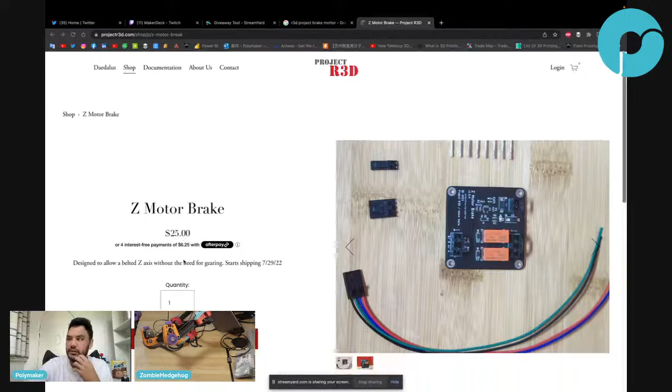A lot of people, and this is something I didn't realize, if you have a dual Z like an Ender 3 using the same stepper motor, and you turn off the printer and adjust the gantry, push it a little bit, they'll go out of sync. I found that out because I had to relevel my bed almost every time I turned off the printer.

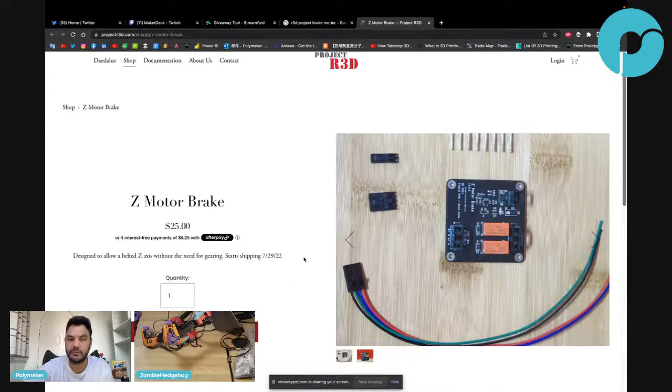Okay interesting, so that's what he was talking about. Yeah, this is an active brake, so it needs power to run. What it does is it locks the magnetic field in place, applying current in a way that holds it. So if you shut down the printer, then it doesn't help, right? I believe so - the gear reduction does help a little bit though. I think that's the case, correct me if I'm wrong.

By the way, this is not a Core XZ, this is just a belted Z. I linked it in chat - it's the Kevin aka Sam belted Z mod for the Ender. The switch wire uses one of those little badge retraction things you put on your belt, so it uses that keyback system.

The what? The key what? Sorry, what's it called? Key something. Someone in chat would know. But it uses a second spring to help tension the Z.

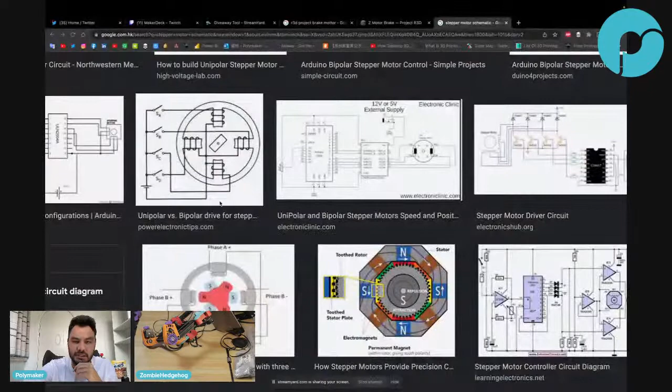Don't want to, so I have to crimp a cable to test that. Let me put it like this. Okay, so the idea is to short - what was I saying?

Hey, good morning, Jerry.

Keyback is like a pro version of the retractable badge chains that you see all the fictional security guards have. Oh, I know what you mean.

But we wanted to see blue magic smoke come out of the stepper. Hopefully nothing's gonna catch fire on Zombie's desk. Zombie is on the stream as well, he's trying to help us understand more about hardware, and he's about to make an Electroboom experiment.

Let's see - the Z brake board physically shorts the coil independently. So what I'm trying to understand here is what does shorting the coil mean?

So that's why I put a schematic on screen in order to understand what shorting the coil means. I understand the coils are circuited differently, and you have all the different switches. I guess when you're making the motor spin, you're playing with all these switches, on and off, and that's what makes it spin. So I don't understand why if you short them, with whatever that means, it's going to stop it from spinning. So yeah, that's the thing.

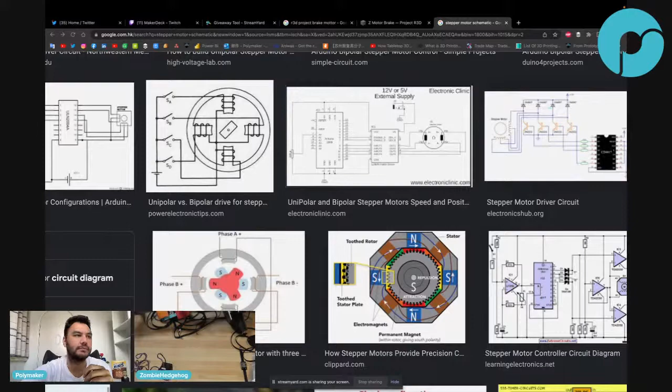Okay, so I have a LDO motor. I have the PDF of it in chat, so that should give me the pinout of the coils. So it looks like... let's strip these real quick. I gotta find which ones are the AB pairs and then link them together.

Okay, so there is A and C, black and green. Black and green are a pair. I cut the wires - yeah, I'm making my own wires anyway, so don't worry about that. By the way, Polymaker is not responsible for whatever's gonna happen.

Oh, interesting. Okay, so not connecting them, it moves typically free, yeah. And I connect the black and the green together. Okay, so it seems that there is shorting out one of the coils, and now there's a lot more resistance. It's almost hard to turn.

And if I short these out, oh, it's completely locked. It's super hard to turn. Well, it's not locked... oh, it spins smoothly. Yeah, I can't feel the steps. It's completely even now. Yeah, it's completely even.

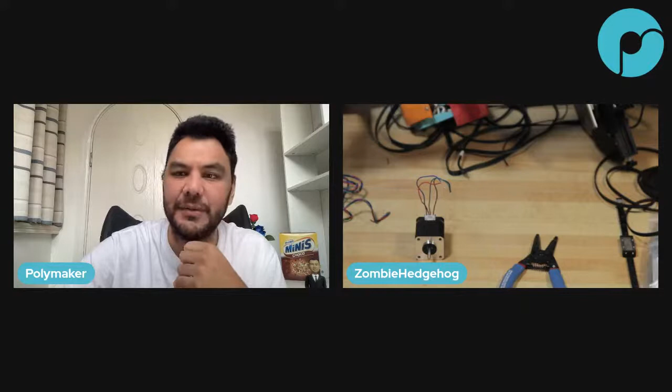Okay, so I think that was for the motion transmission - we were talking about ball screws. Just to link that to what we're talking about now, I think the last one is movement system, but how about we keep that for another stream, because I think there's a lot to say about that element. I did spend almost 2 hours just on the core XY. There's not a ton to talk about for the traditional stuff, but there's a lot you can talk about.

Thank you very much, Zombie, for sharing all of this knowledge, and I really like that you made live experiments. That's the best way to understand things around us - you just get it in your hand and play around with it. And apparently you also discovered something, which is the goal, right?

We're all learning. I'll answer Michael's question real quick. He says: I have an off-topic question - if I built a 3D printer from scratch, how do I get it to work? Is it as simple as customizing firmware like Marlin?

There's a lot to it. You need to select all your components. Everything we're talking about today - you need your motion system, the guiding system, the actual type of motion - and then you need a controller that's configured for that motion system.